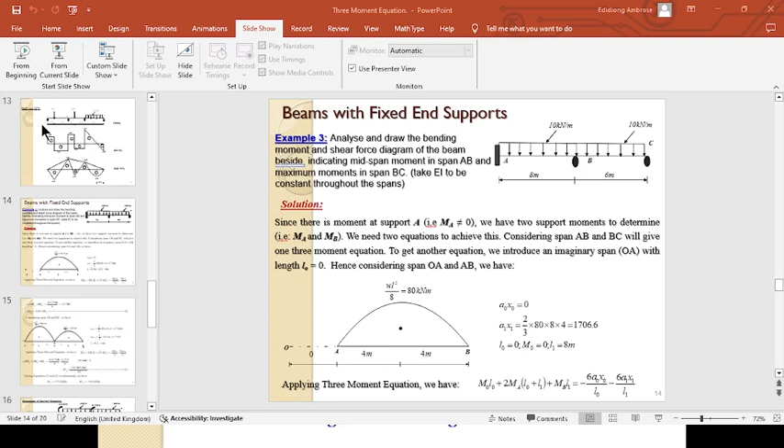Hello, welcome to part 3 of our lesson on the method of three moments equation, using it to analyze statically indeterminate structures, most especially continuous beams. So in our first two videos, we started this lesson by introducing and deriving the three moments equation. We have used it to solve two examples so far.

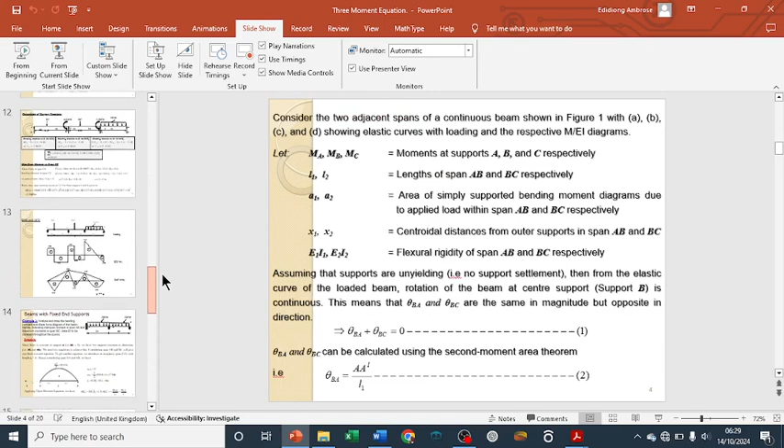So in this particular video, we are going to use the method to solve beams with fixed ends. Okay, let's start with beams with a fixed end support. The other examples we have solved have been beams with simple supports at the end. So what about when we have one end fixed? How do we handle it? That's what we are going to do, by looking at example 3.

Analyze and draw the bending moment and shear force diagram of the beam beside, indicating midspan moment in span AB and maximum moment in span BC. Take EI to be constant throughout the span. The first thing to note is that since there is moment at support A, MA is not zero. We have two support moments to determine, MA and MB.

So MA and MB, there are two moments here. That means we need two equations, a 2 by 2 simultaneous equation. But we only have two spans, and with two spans we can only derive one equation based on the three moments equation. So what do we do? We go to where we have the fixed support and introduce an imaginary span that is actually not there. We use that span and span AB to derive one equation, then use spans AB and BC to derive another equation. That is what we are going to do.

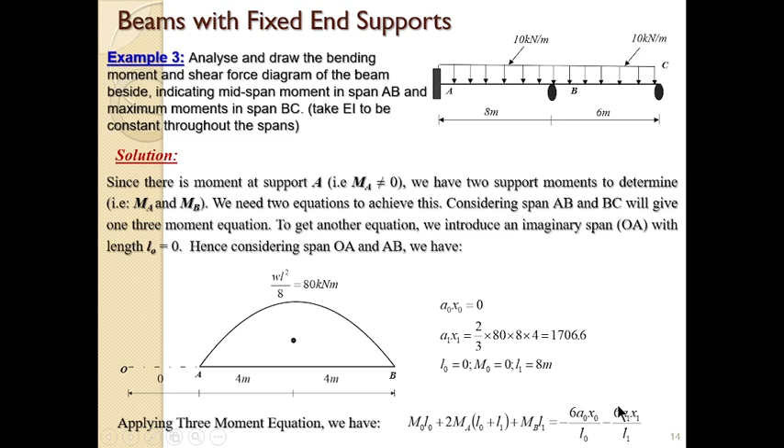So we apply the three moment equation using span OA and span AB. We have M0 L0 plus 2MA into L0 plus L1, and so on. Substituting the values, L0 is 0 and L1 is 8, so 8 times 2 is 16 MA. The right side is 6 times 1706.6 divided by L1, which is 8. So we have 16 MA plus 8 MB equals minus 6 times this over 8, which we reduce to make MB the subject of the formula: MB equals minus 160 minus 2 MA. Let's call this equation 1.

Next we consider span AB and span BC. This is WL squared over 8 for each span. The centroidal distance for AB is halfway, which is 4, and for BC halfway, which is 3 meters. So we calculate A1 X1: A1 is 2 over 3 B times H, centroidal distance 4, which we calculated before. A2 is 2 over 3 times B times H, centroidal distance 3, which gives us 540. Remember, L1 is 8 meters and L2 is 6 meters.

So we write the three moment equation again in terms of spans AB and BC, put in all the values as usual. But remember that MC is 0 because this support is simply supported. So we put MC equals 0. Having done that, this equation reduces to MB equals minus 1819.95 minus 8 MA all over 28. We call it equation 2.

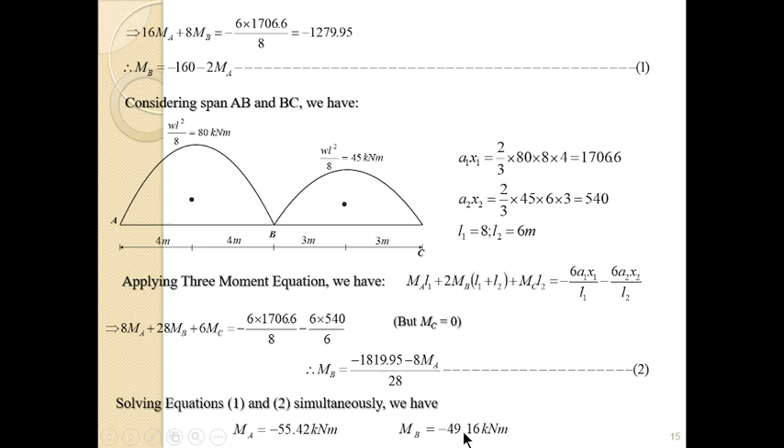So if we solve equation 1 and equation 2 simultaneously, this is what we have: MA equals minus 55.42 and MB equals minus 49.16. So by finding our support moments, we can go ahead and use the usual method to find our support reactions. But let me point out something.

In this case, the first one is to take moment at B to the right hand side. Remember, when you're taking moment at B to the right hand side, the sign convention will be that clockwise moments are negative and anti-clockwise moments are positive. Now the next one is taking moment from B to the left hand side. What I want to show you, if you are taking moment from B to the left hand side,

the first force you calculate, remember this is VA, so this is the one due to VA. This is a component due to our UDL, and this is the one due to this moment that we have here. So we equate it to the moment here, and that gave us this. Take note of that. You can use the sum of vertical forces to find VB. And so we draw the bending moment diagram and shear force diagram as usual.

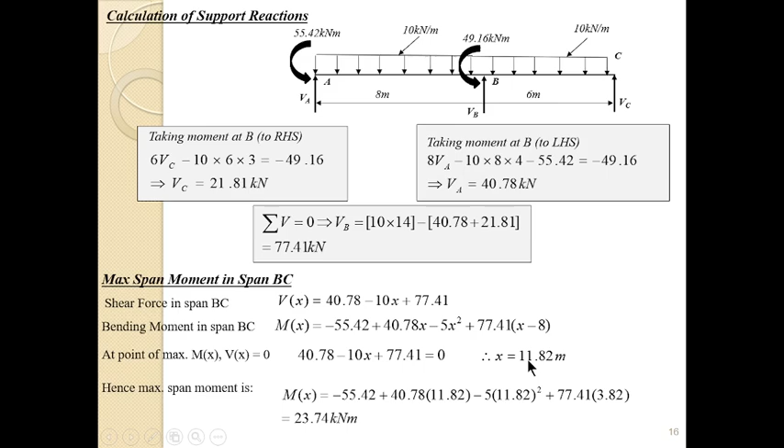Remember, first of all plot the moment. This is the moment that we have, and then the simply supported beam. In this simply supported beam, the moment at midspan we have calculated might not necessarily be the maximum moment. But in this one, we were told to calculate the maximum span moment, and the maximum span moment will not be at midspan. So we need to follow the process again, derive the equations, and find them like we did in the other two examples. So this is our final bending moment and shear force diagram for this example.

The last case we are going to consider is beams with an overhanging span. That's when you have a cantilever at the end of a support. For such a support, we follow the entire process like we did for the simply supported one. The only difference is that for the simply supported one, we know the moment here is 0. For the one with a cantilever, the moment will not be 0, but the moment due to the cantilever.

In this case, you have a 25 kilonewton load at a span of 1.5. Because this is an anti-clockwise moment, the moment MC at this point will be due to the cantilever, which is minus 25 times 1.5, giving minus 37.5. So your MC is minus 37.5. That is what you use throughout the entire exercise. So how many unknowns? We know this to be minus 37.5. We know this to be 0. We only have one unknown and we have two spans.

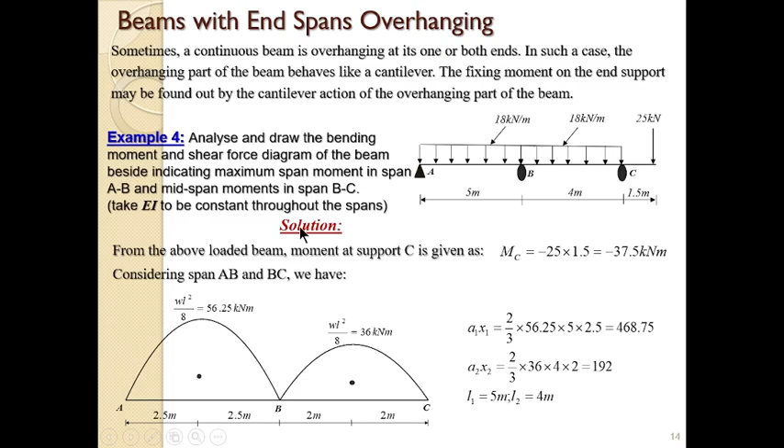So we use the three moments equation with the simply supported moments: WL squared over 8 gives us 56.25 here, and WL squared over 8 here gives us 36. The centroid distance from the center: this one will be 2.5, this one will be 2 meters. We now calculate A1 x1 and A2 x2. Remember, L1 is 5 meters, L2 is 4 meters. So we go ahead by doing that.

So having done this, the next thing is to apply the three moments equation. Applying it and substituting our values, we have this. But we know MA to be 0, and MC to be minus 37.5. So we substitute. This one will go, and MC is minus 37.5, so that is why we put this. Doing that, we are left with only one unknown, MB,

which gives us minus 38.92. So wherever you have a cantilever like this, the moment at that support is just due to the cantilever load. Just multiply the cantilever load by the perpendicular distance, and it will be minus because support moments are always minus. So go ahead and draw the bending moment and shear force diagram as we have done in other examples. But take note in this bending moment diagram.

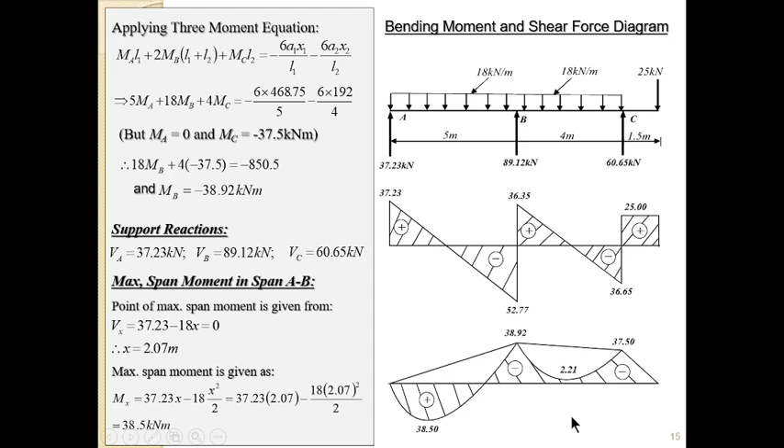This place is 38.92, this place is 37.5. The midway will be this plus this divided by 2. But notice that the simply supported moment for that span is only 36. So the average here is already greater than 36. If you subtract, it gives you minus 2.2. That tells you the span moment here is still upward, not downward. That is why this place looks like this. Take note of that. Go ahead and solve these other examples to reinforce your understanding of the three moments equation.